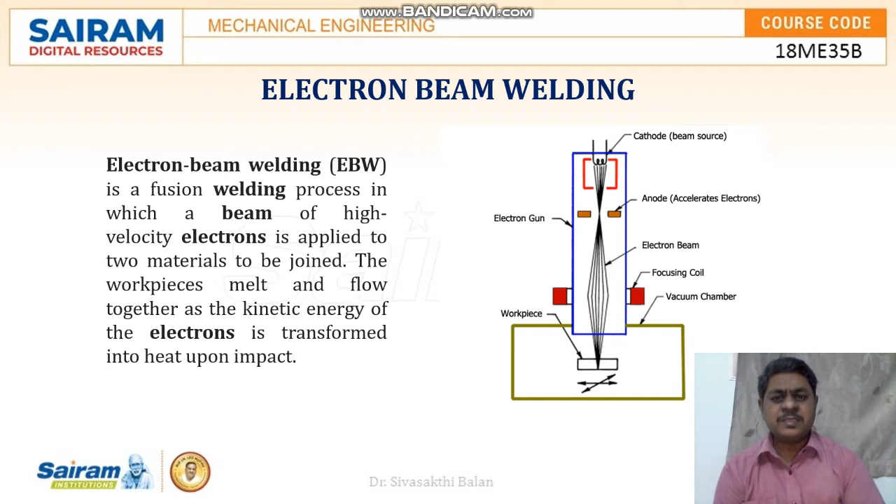The working principle of electron beam welding is explained through this animation. In this video we will learn electron beam welding process, the main parts, and functions of different parts of an electron beam welding setup. So, let's get into the topic.

We know that welding is the process by which generally two or more parts of metals or thermoplastics are joined together or united together by either applying heat, or by applying pressure, or by applying both heat and pressure. In electron beam welding, this joining of parts will be obtained by applying heat.

And by the name electron beam welding, we can understand that we will be using electron beam to generate heat, and create the welding joint between the parts using this generated heat from electron beam. So, let's look into the working process and major components used in electron beam welding. Here we have a power supply that will run the entire process.

This electron beam welding process uses a continuous power source to supply power for continuously generating beam of electrons throughout the welding process. The voltage range of welding is about 5 to 30 kilovolts for low voltage equipments or for thin welding, and 70 to 150 kilovolts for high voltage equipments or for thick welding.

To start the electron beam process, the first thing we need is something that will generate the electrons. So, here we have an electron gun. This electron gun is the heart of electron beam welding. It is a cathode tube with negative pole, which generates electrons. This electron-generating cathode tube or electron gun is mostly made by tungsten or tantalum alloys.

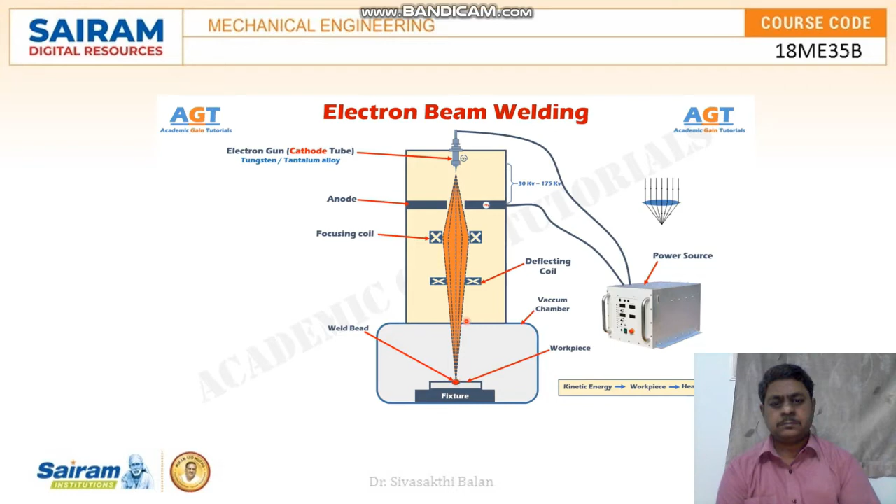is obtained. Now, since the welding is done in a vacuum-sealed chamber, it is not possible to manually move the workpiece from one position to another when one position has been joined. Thus we need to control the positioning of the workpiece from outside the vacuum chamber using computer numeric controls. So, this is how the electron beam welding process works.

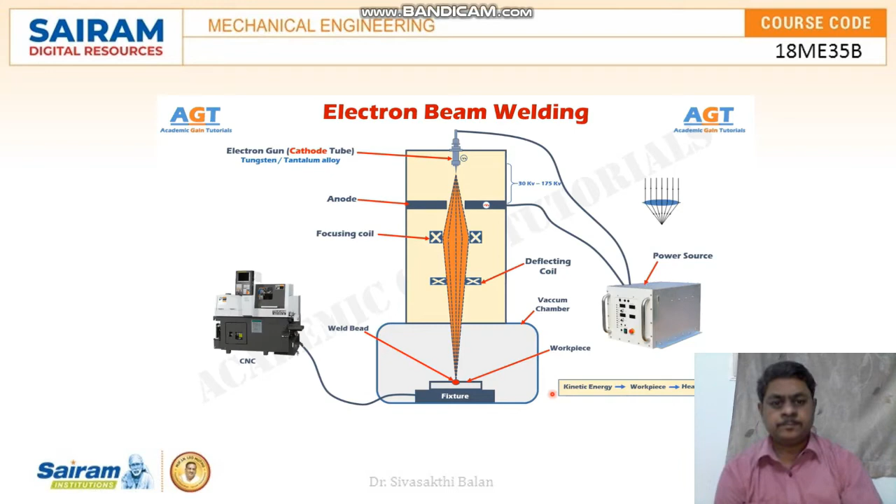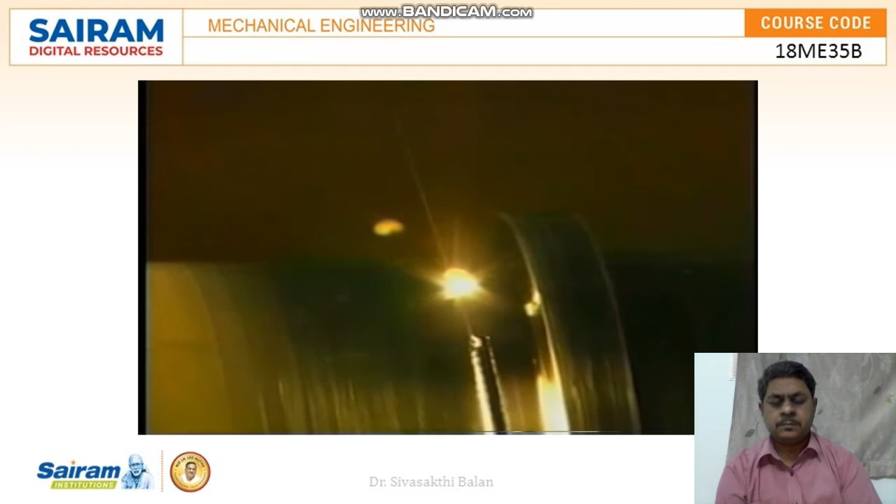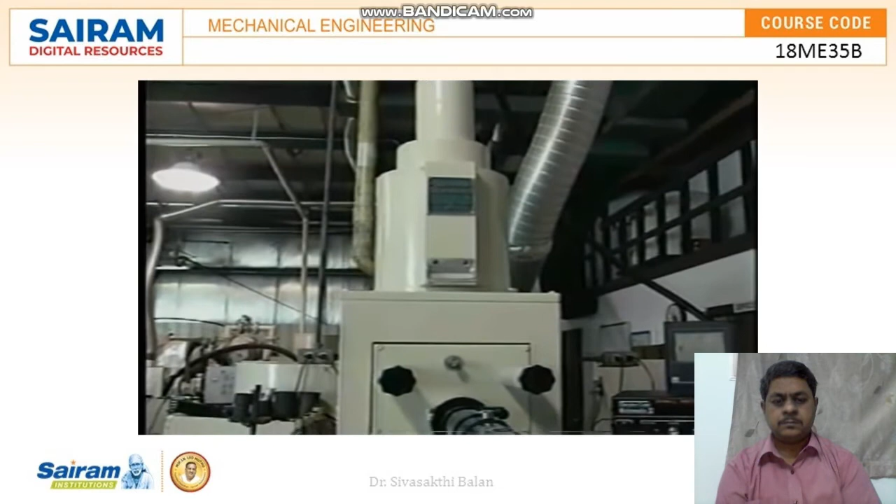Now, these following clips explain how electron beam welding takes place in real time in industries. In electron beam welding, the coalescence heat is generated by the kinetic energy of a focused stream of electrons directed upon the joint. The electrons are produced by an electron gun, accelerated to high velocity, shaped into a beam by electrical fields, and then further collimated or made parallel and focused by an electromagnetic lens.

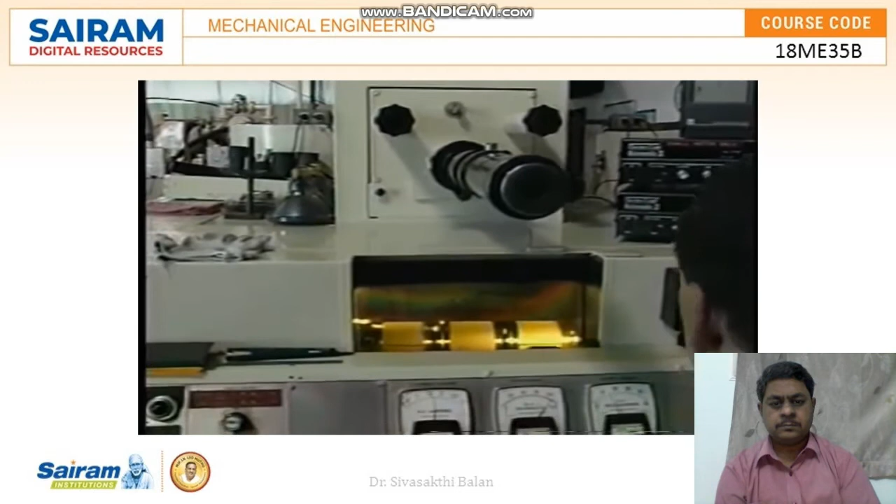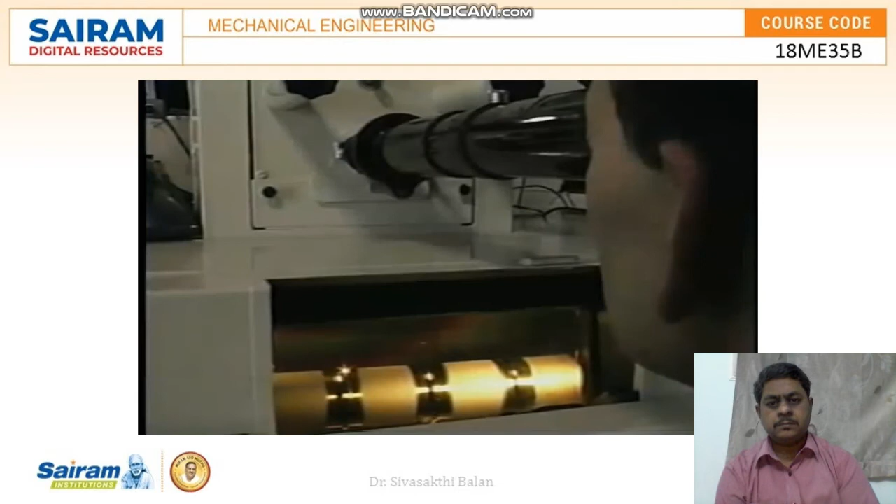This electron stream is developed in high vacuum, but actual welding can be performed in either high vacuum, partial vacuum, or standard atmospheric pressure. Because of the intense and concentrated heat generated, total heat input is low, minimizing heat-affected zone size and part distortion. This also allows for the creation of extremely deep and narrow welds. Additionally, joints inaccessible by other welding processes can be welded.

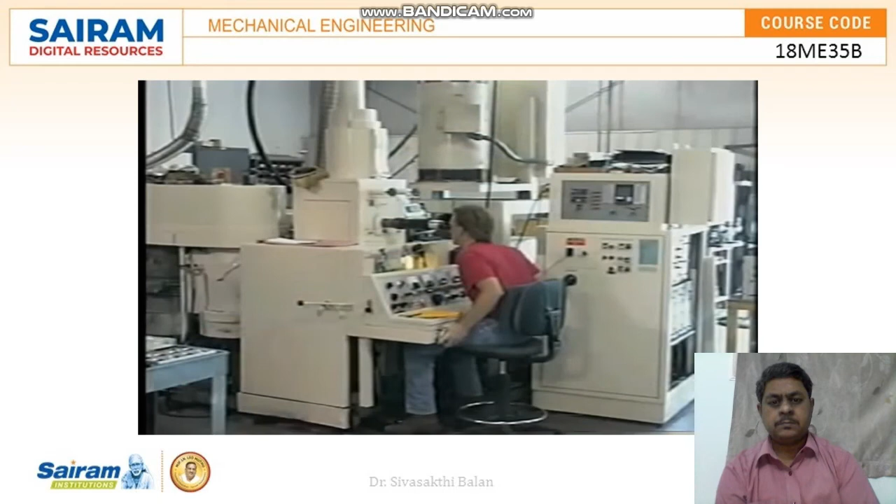Virtually all ferrous and non-ferrous metals, thin or thick, can be joined. Welding speeds are fast, and filler metal is not generally required. Equipment cost for electron beam welding is typically high, and welding is generally limited to machined parts assembled in primarily butt, corner, and lap joints.

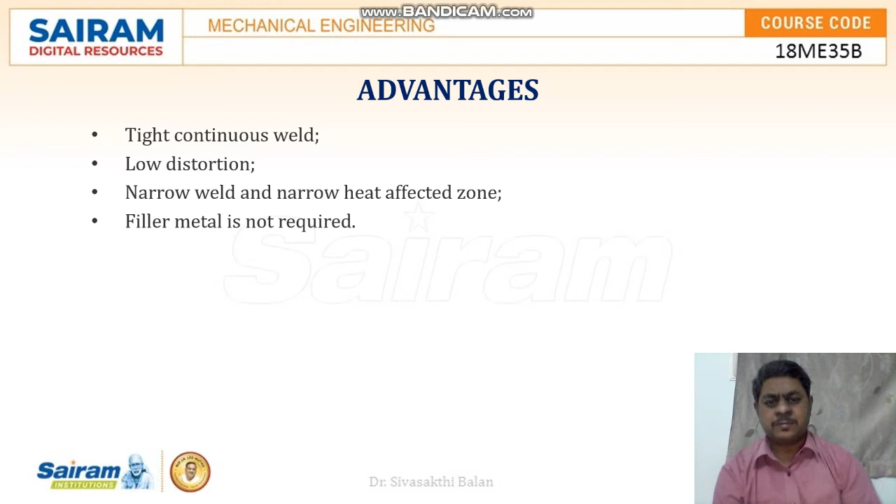Advantages of electron beam welding. It's a tight, continuous welding process. Low distortion takes place. It is used even for narrow welds, and it causes a narrow heat affected zone. Filler metal is not required for this welding process. The disadvantages are, it is highly expensive equipment, and it causes X-ray irradiation.

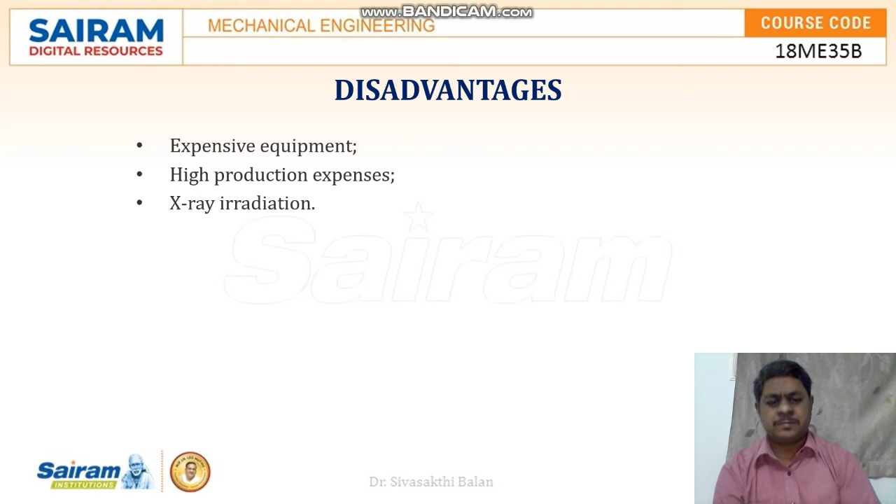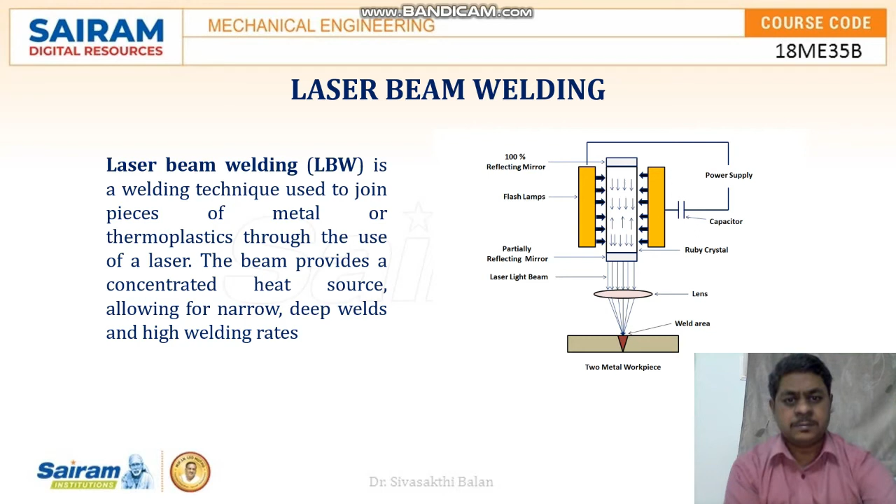Laser beam welding. It is a type of fusion welding in which a beam of laser is used to join the metal to be welded. The following animation shows the working principle of laser beam welding. A laser is produced when the electrons in atoms of special crystals are energized using electric current. Generally, garnet crystals are most commonly used in solid-state lasers. Yttrium aluminium garnets doped with neodymium, also called Nd:YAG, are most popularly used.

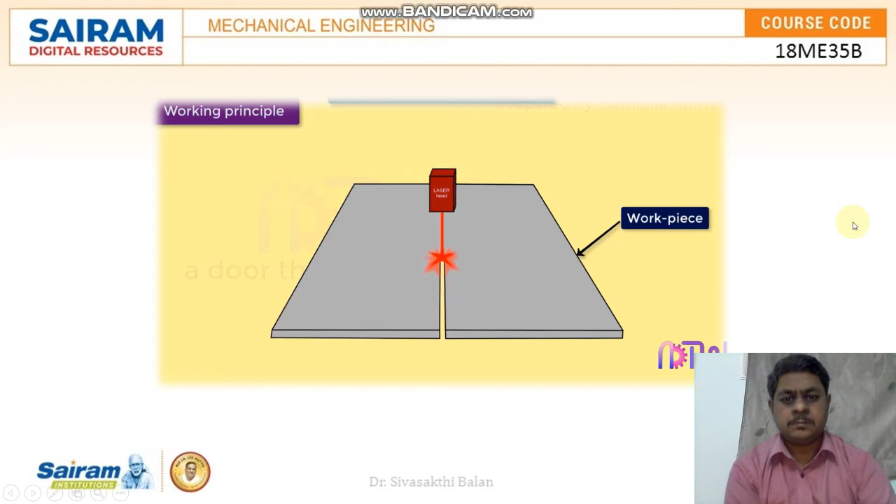These excited electrons emit photons. Photons are the particles of light, and these emitted photons form a concentrated beam of light, forming a laser. As the laser beam strikes the surface of the workpiece, the heat energy from the laser beam is transferred to the workpiece. This heat energy absorbed melts and vaporizes the material from the workpiece surface.

Construction. The laser beam machine consists of the following parts. Power supply. It requires a power supply of 1 to 10 kilowatts. A high voltage power source is used to produce light in flash tubes. Flash lamp. The flash lamp or flash tube is used to charge the electrons of the atoms in the crystal, which is also called the pumping medium.

Capacitor. The capacitor is used for operating the laser beam machine in pulses. Pumping medium. The pumping medium in this case is a ruby crystal, which has a large number of atoms which, when they absorb the energy, their electrons produce photons. Working. When the switch is turned on, a high voltage power supply is applied across the flash tube surrounding the pumping medium, in our case the ruby crystal.

As the light is powered on, it emits high energy photons. These photons are absorbed by the ruby crystal. This absorbed energy causes most of the electrons contained in the atoms of the ruby crystal to be excited to a high energy level from their ground state. After a short duration, as the electrons from the high energy level come to ground state, they emit photons. This emitted photon stimulates the excited electrons to return to their ground state, thus producing more photons. Thus a pair of photons is obtained by utilizing one photon.

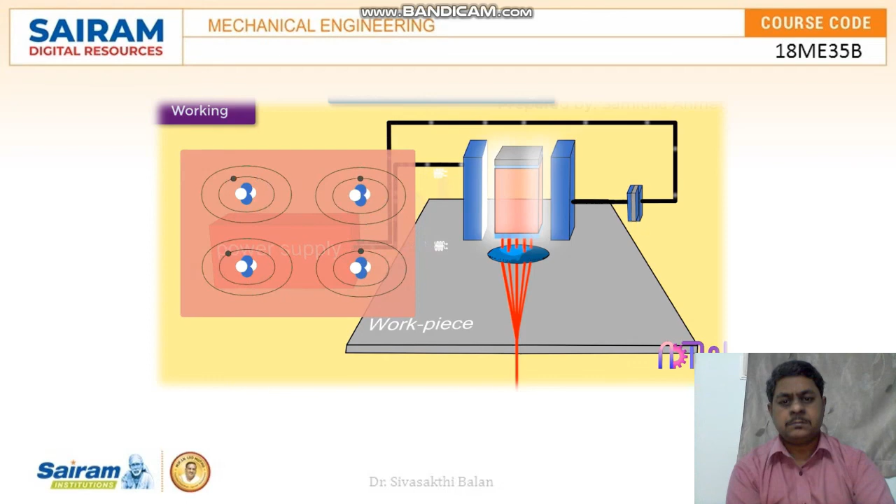Thus, we call this process light amplification by stimulated emission of radiation. As the photon concentration increases, the laser is formed. A 100% reflective mirror is used to reflect all the photons back to the crystal, whereas a semi-reflective mirror reflects some of the photons back, and photons escaping through the semi-reflective mirror form a high-energy laser beam. Then a lens is used to focus the laser beam onto the workpiece to be machined.

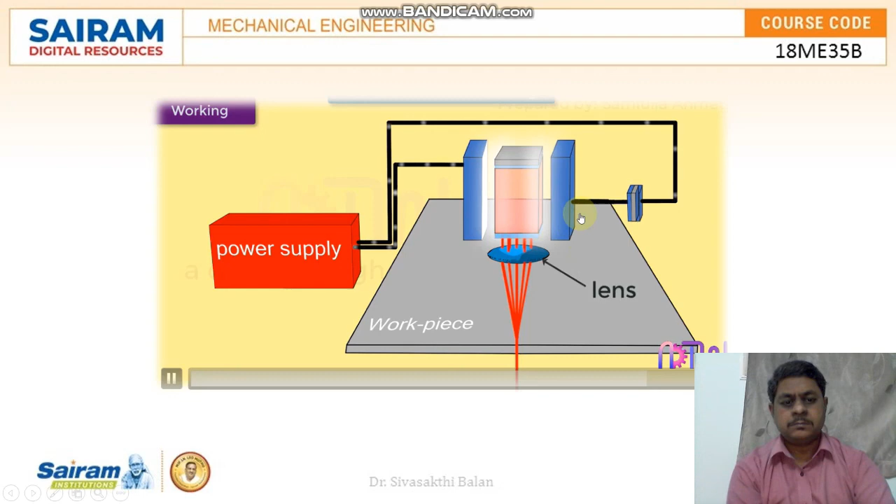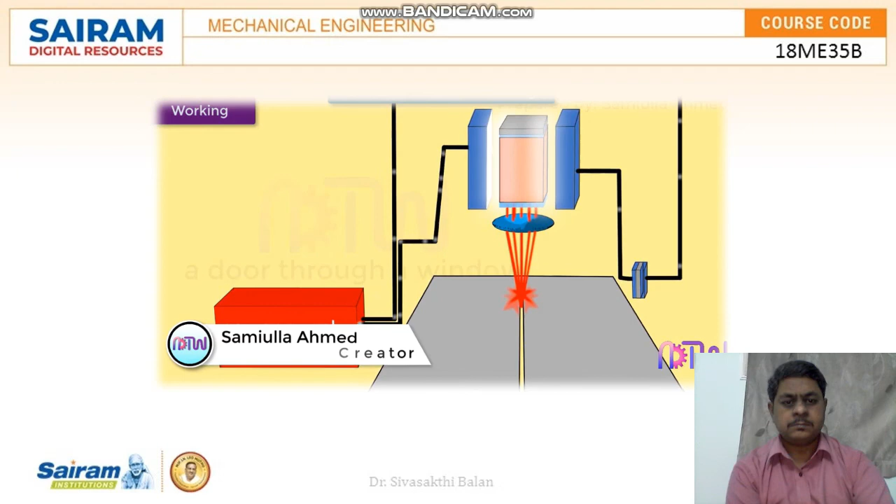Interaction of the laser and workpiece produces a large amount of heat, thus vaporizing the surface of the workpiece, cutting grooves of various shapes, or cutting the workpiece. This is how the working of laser beam welding takes place.

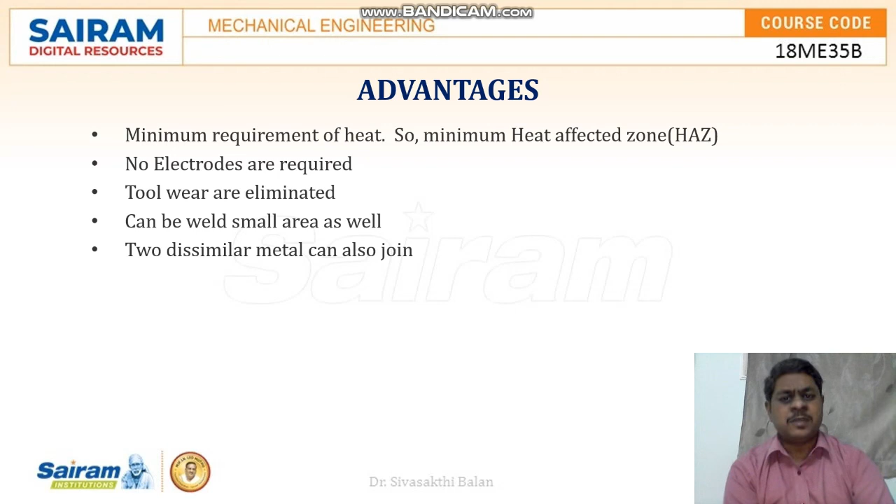The advantages of laser beam welding are it requires minimum heat, so a minimum heat affected zone happens. No electrodes are required for this type of welding process. Tool wear is eliminated and it can be used to weld small areas as well. Two dissimilar metals can also be joined using laser beam welding.